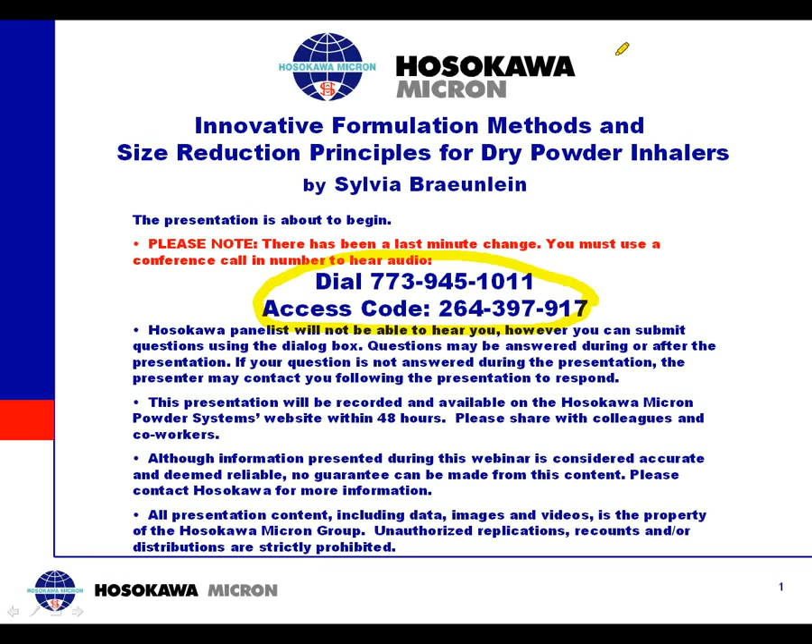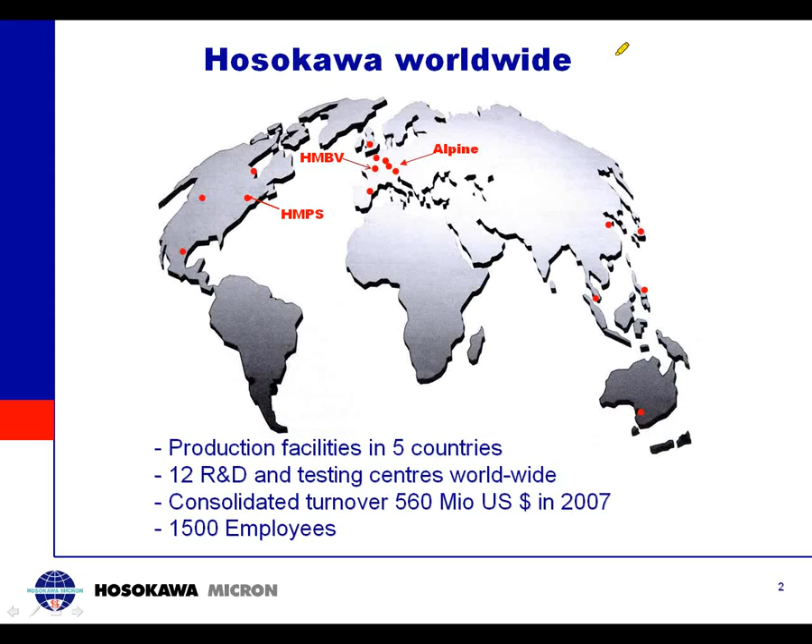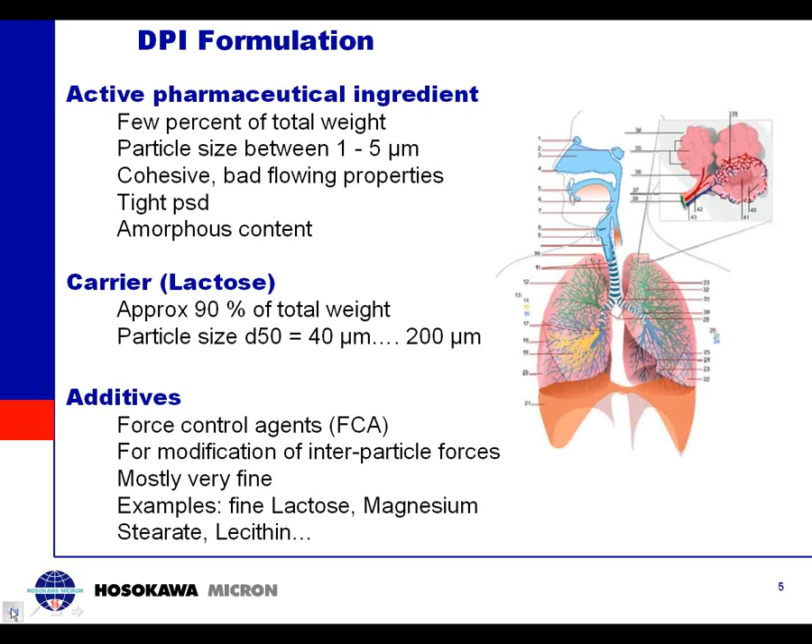These requirements need special attention when it comes to choosing the suitable micronization or particle size reduction technique. The actual formulation of the carrier and the ingredient is done by intensive mixing or mechanochemical bonding. This presentation covers the different grinding techniques as well as the formulation techniques for inhalers.

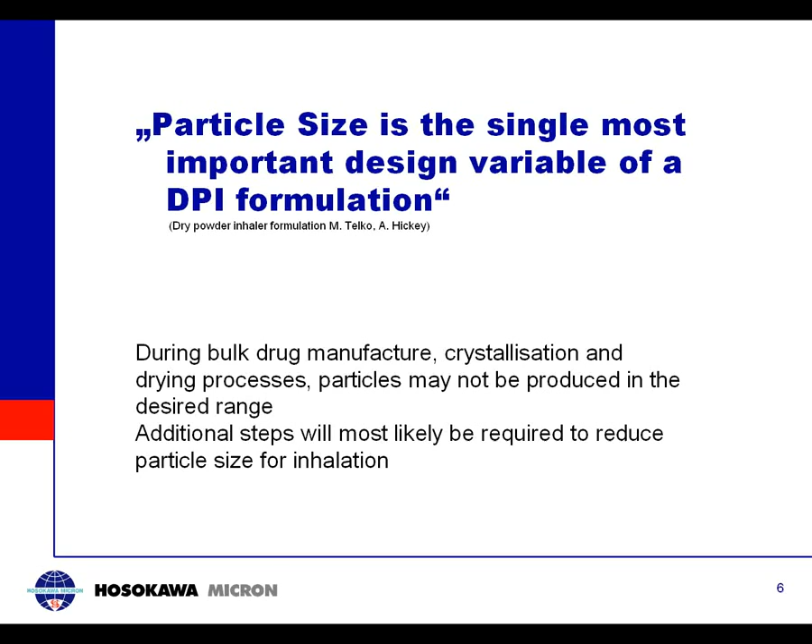Particle size is the single most important design variable of a DPI formulation. This is taken from a paper given by Mr. Telko and Mr. Hickey, Dry Powder Inhaler Formulation. Like in any other drug production, the actual manufacturing process, including crystallization and drying, cannot be sufficiently controlled to achieve the required particle size. Therefore, additional steps - in some cases only deagglomeration after the dryer, or real grinding - need to be added to get the right particle size for inhalation.

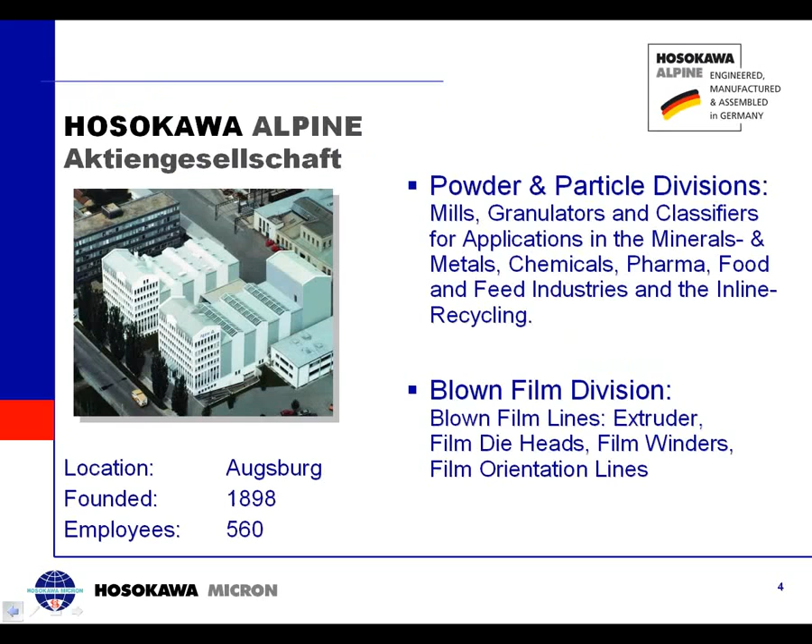I think there's a slide problem. I clicked too many times on this. Okay, here we go, sorry for that. Why is particle size - I think we missed a slide out here. I'm sorry again for the problem. Let me try again to go back. Okay, here we go, sorry.

Why does particle size play such an important role in the production of inhalers? Extra fine particles, for example, improve lung delivery, and particle size plays a crucial role in the bioavailability, solubility, and dissolution properties of drugs. Since dry powder inhalers are low-dose drugs, content uniformity is of extreme importance, and proper control of the particle size distribution is a key factor for content uniformity. Dry powder inhalers are often delivered as an aerosol suspension in a propellant, for which, again, the proper particle size control is crucial.

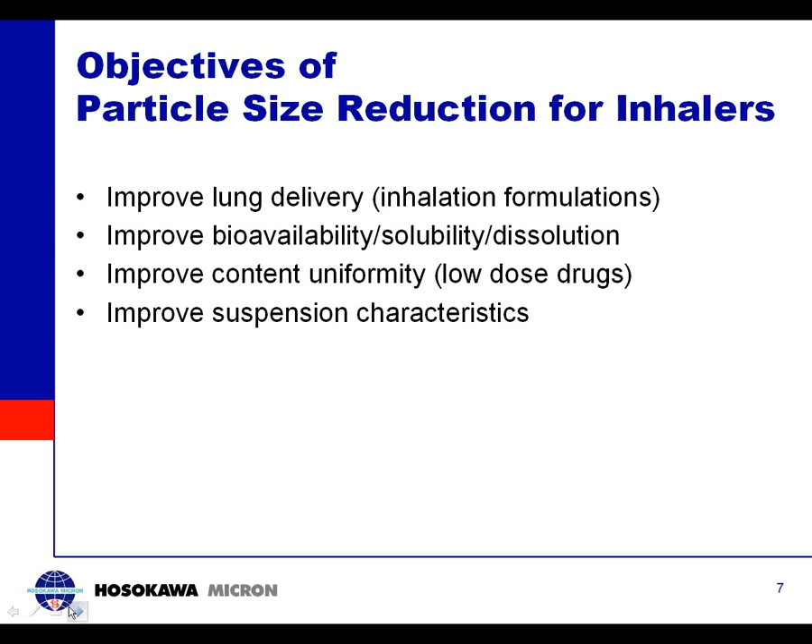To choose the suitable milling equipment, it's required to characterize the different powders to be processed. Product properties such as hygroscopicity, flowing properties, bulk density, etc. have an influence on the suitable type of mill. And of course, it's required to know the actual starting size of the feed material after the dryer, for example,

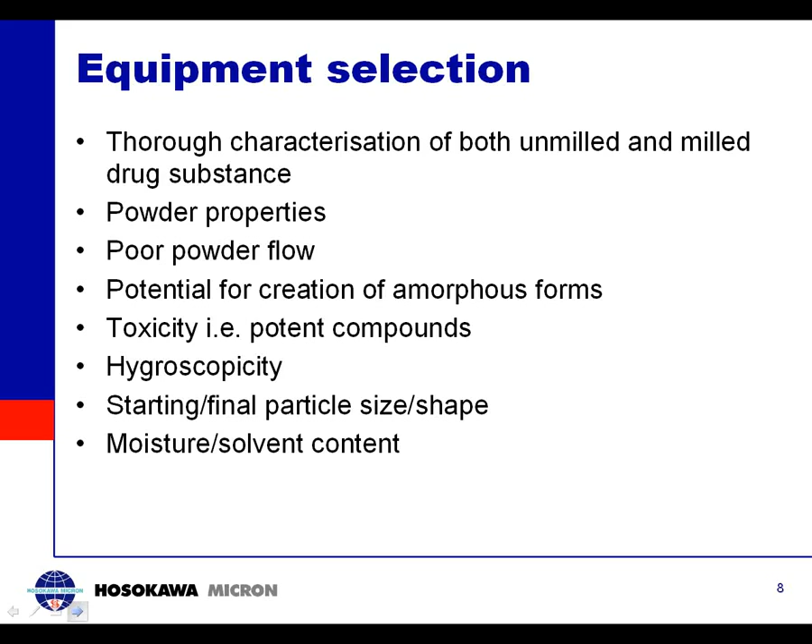because pre-crushing or deagglomeration might be required before the actual fine milling of the powder. This is an overview of the different mills typically used for fine milling APIs and the carrier material. In a second part, we will present techniques for the formulation of DPIs, and we will start with an explanation

of the different mill types and introduce applications, benefits, and limitations of each equipment. We'll start with the typical equipment used for micronization of APIs. The most common jet mill used in pharmaceutical industry for micronization of very fine particles is the spiral jet mill,

or so-called pancake mill. Shown here is a sketch of a typical spiral jet mill with its internals. You can clearly see the feed injector for product supply at the top of the grinding chamber. At the outside of the grinding chamber is the air ring manifold, which allows the compressed air or gas to be distributed to the nozzles.

The grinding gas is injected through a number of nozzles, you can see here, typically tangentially positioned at the nozzle ring. The fines outlet is at the center of the mill. The particles fed to the grinding chamber are accelerated by the high gas flow, typically in the range of 4

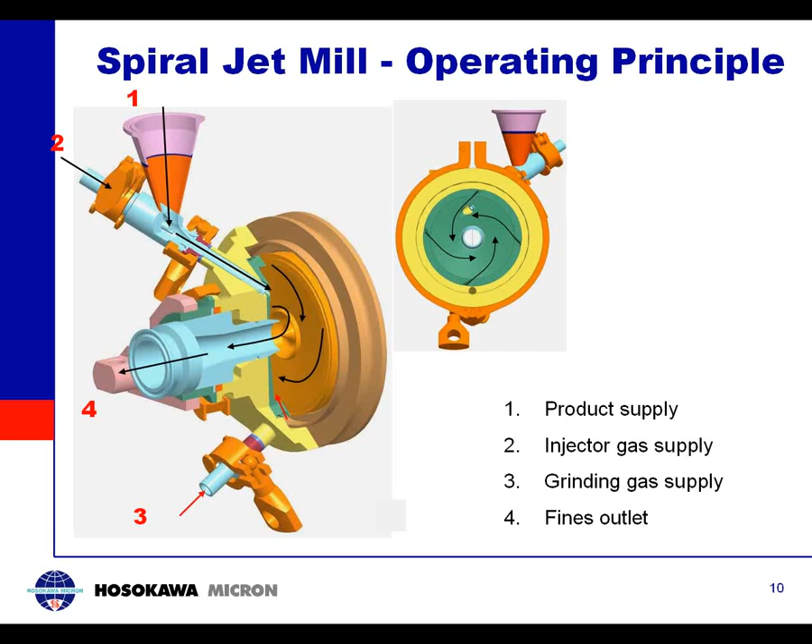Although spiral jet mills have almost vanished completely in other industries and have been replaced by more controllable fluidized bed jet mills, they still have a number of huge advantages for pharma applications. Due to the fact that there are no movable parts and they got a clear and simple design, no drives, etc., they are relatively easy to inspect and to clean.

In general, jet mills do not create heat during grinding, which is an advantage, since most pharmaceutical powders are somehow heat sensitive. And due to the above points, maintenance of those mills or operation under contained conditions is rather simple.

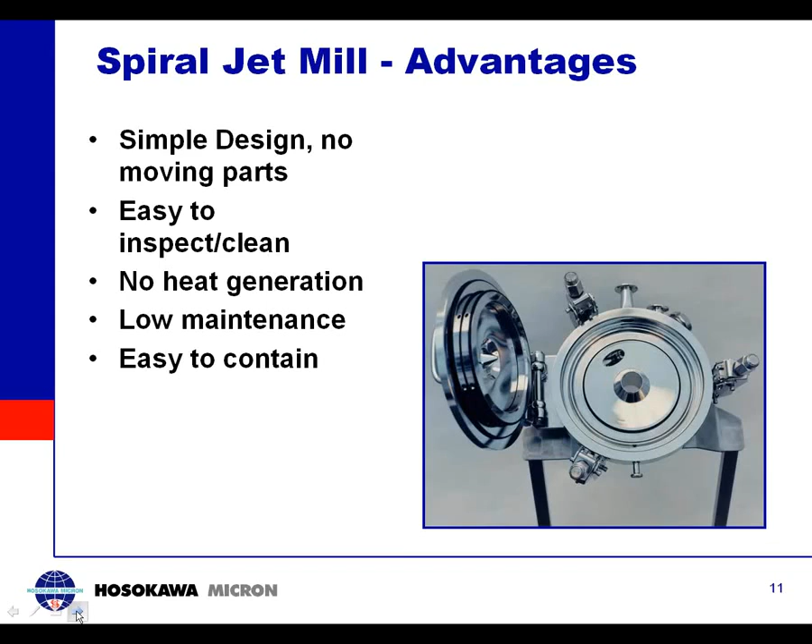The simple design of spiral jet mills comes with a number of disadvantages and limitations. Feeding is generally realized via an injector, and that means a narrow product feed inlet diameter to the mill, which limits the size of particles that can be actually fed to the mill to some single millimeters.

If the product has agglomerates, typically achieved after the dryer, a pre-crushing step, for example in a conical screen mill, is required before actually feeding to the spiral jet mill.

The biggest disadvantage of a spiral jet mill is that they are very sensitive to changes in feed material. If size and properties of the feed material changes, then the final particle size will vary accordingly.

end fineness. One issue with spiral jet mills is that the particle wall collision can be very negative when processing abrasive materials. This effect is not so often seen with pharma products, but if the products are abrasive, then this can be a major problem.

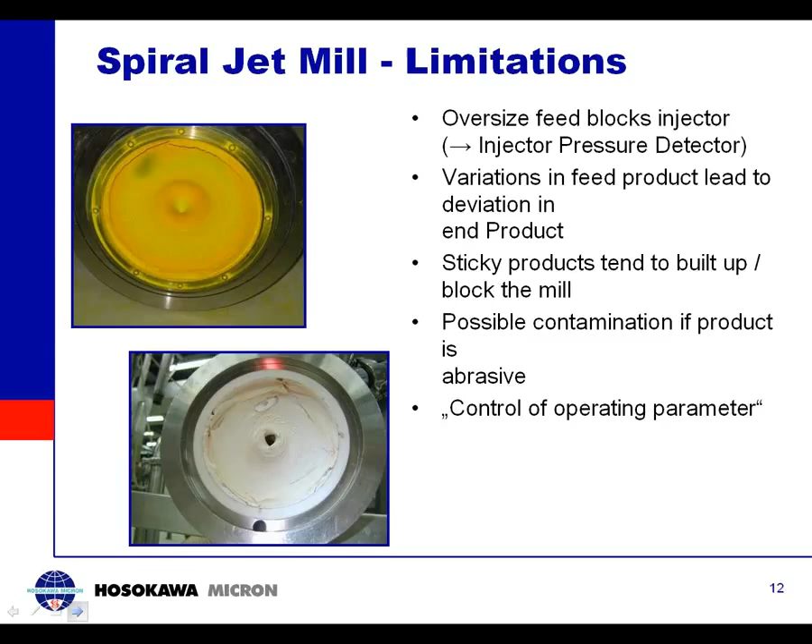Finally, spiral jet mills are rather difficult to control because unstable feed rates, build-ups, etc. have an influence on the flow pattern in the mill and therefore the final particle size.

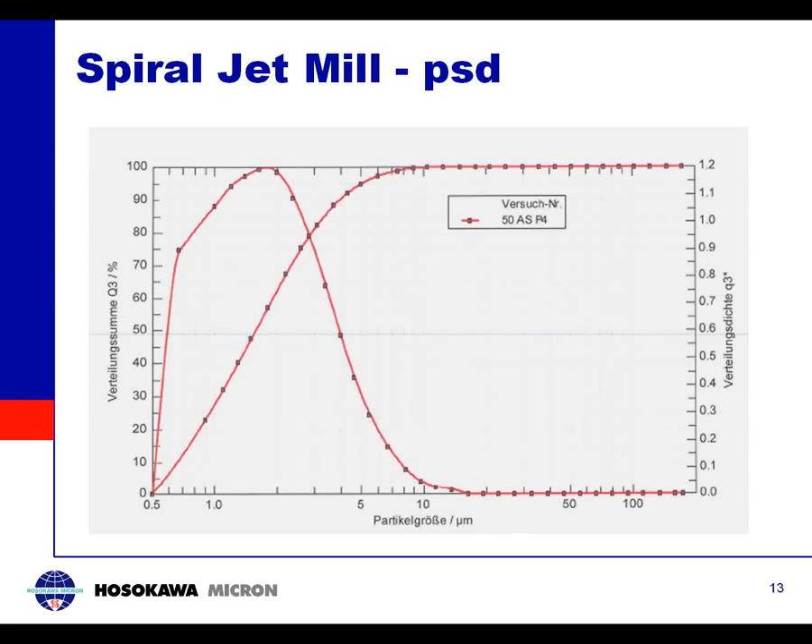The following graph shows a typical particle size distribution achieved on a spiral jet mill. What's characteristic for the spiral jet mill is the small proportion of oversized particles which are typically able to leave the mill more or less unground because there is no classifier installed in that mill, apart from what we call a static classifier.

Spiral jet mills come in many sizes depending on the required capacities or batch sizes. The left-hand picture shows a typical size of a small production unit. The spiral jet mill in that picture is 140 millimeter diameter, which gives typical capacities in the range of 5 to 10 kg per hour.

The complete system is a very simple setup, consisting of a feeding unit, in this case a twin screw feeder with an agitator, feeding directly into the injector of the mill. The fine product dispersed in air gas is conveyed to the automatic filter, where the product is separated from the airstream and discharged through a simple manual flap valve into a container. The container is not shown in this stage.

There is a HEPA filter installed after the automatic filter, and a blower which is installed in a technical area, not shown on the photo. The blower serves for conveying the process air. As you can see, the installation of a spiral jet mill can be rather compact, which is again an advantage because it's easy to clean.

The actual photo shows a unit that is also sterilizable. Feeder and mill can be sterilized in an autoclave, completely mounted on the movable frame, and the filter can be separately sterilized on its frame.

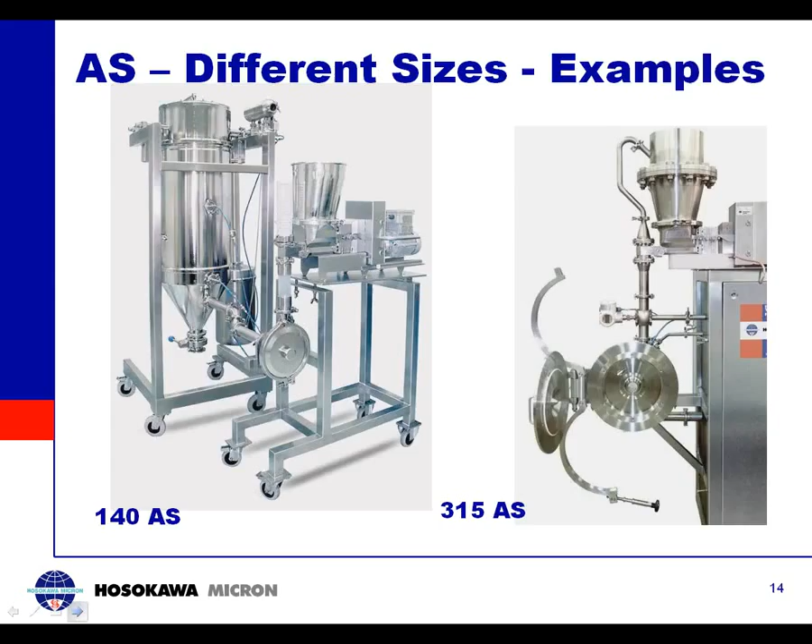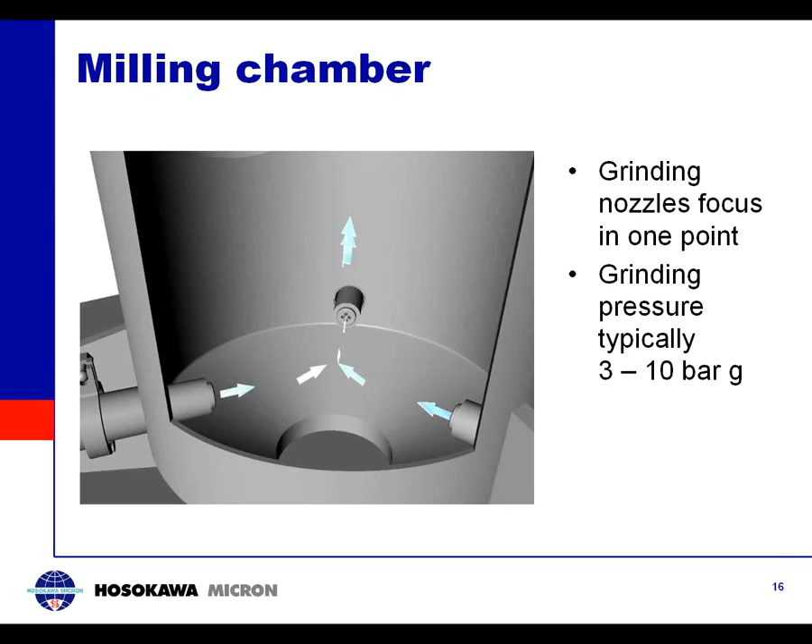This slide shows the bottom section of the fluidized opposed jet mill with the grinding nozzles. Contrary to the spiral jet mill, the nozzles focus in one point, and compressed air gas is applied at pressures in the range of 3 to 10 bar. The product is fed to the mill gravimetrically and falls into the actual grinding chamber. There the particles get accelerated by the fast gas stream, and grinding takes place in the center of the mill by particle-to-particle collision.

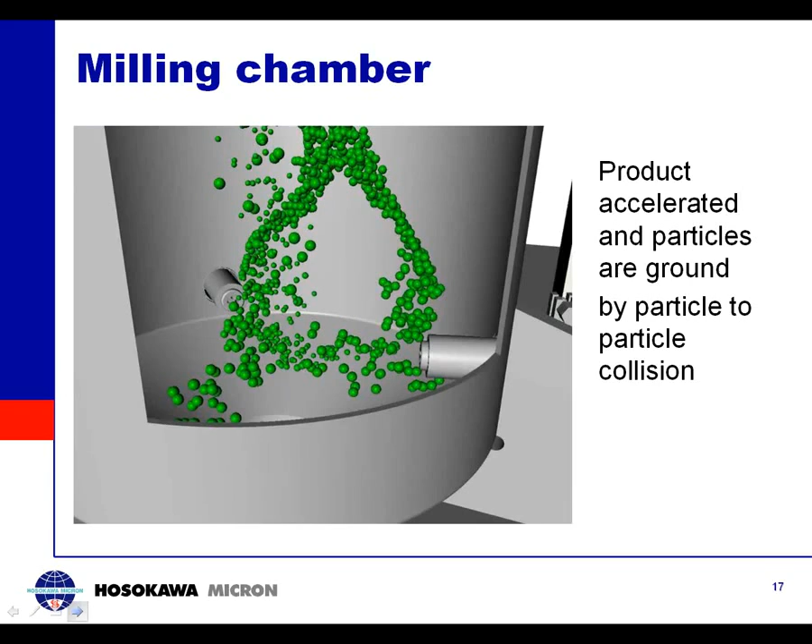The particles are offered to the integrated air classifier. This classifier is driven by a frequency converter, and the speed can be steplessly adjusted. The air gas flow has to go through the lamellas of the classifier wheel. The particles are subject to two forces, the drag force of the air and the centrifugal force of the classifier wheel. Fine particles rise with the air, whereas coarse particles are rejected by the classifier and drop back into the mill. High classifier speed means a fine end product, low speed means a coarser product. It can be adjusted, as said, steplessly.

These classifiers are typically suitable for finenesses in the range of 5 to around 150 micron. Anything else in between can be adjusted.

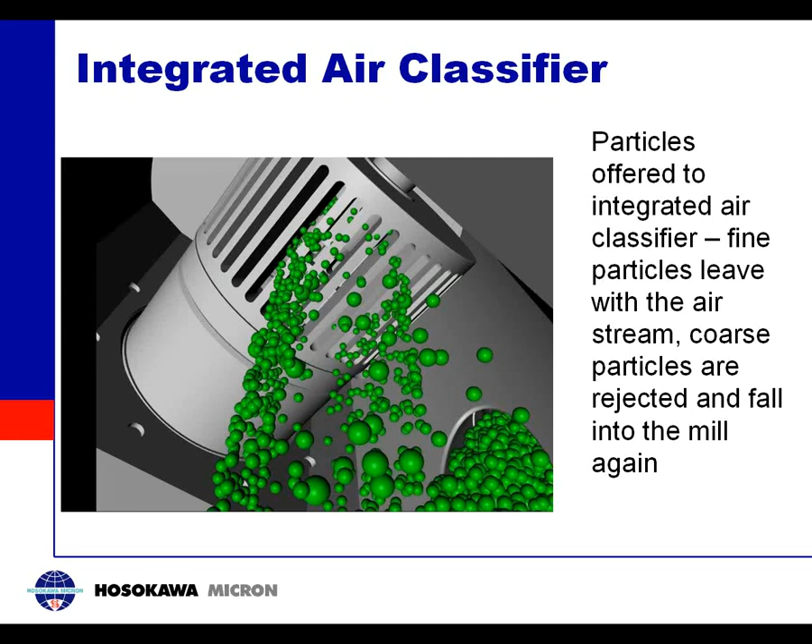I think the explanation of the working principle leads automatically to the advantages of those kind of mills. With the integrated air classifier, it is possible to exactly adjust the end fineness, and such a mill is much less sensitive to variations in feed material. Due to the fact that grinding takes place by particle-to-particle collision, there is no contamination and no wear. Typically, those mills create a steeper particle size distribution because the particles will leave the mill almost immediately if they can pass the classifier wheel.

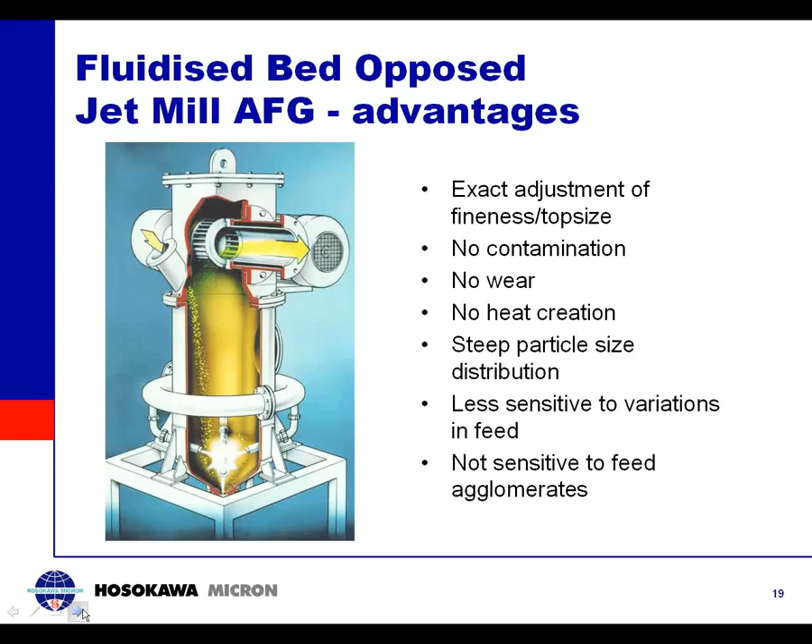Feeding can be realized through an airlock. Therefore, these kind of mills are not sensitive to agglomerates in the feed material, etc.

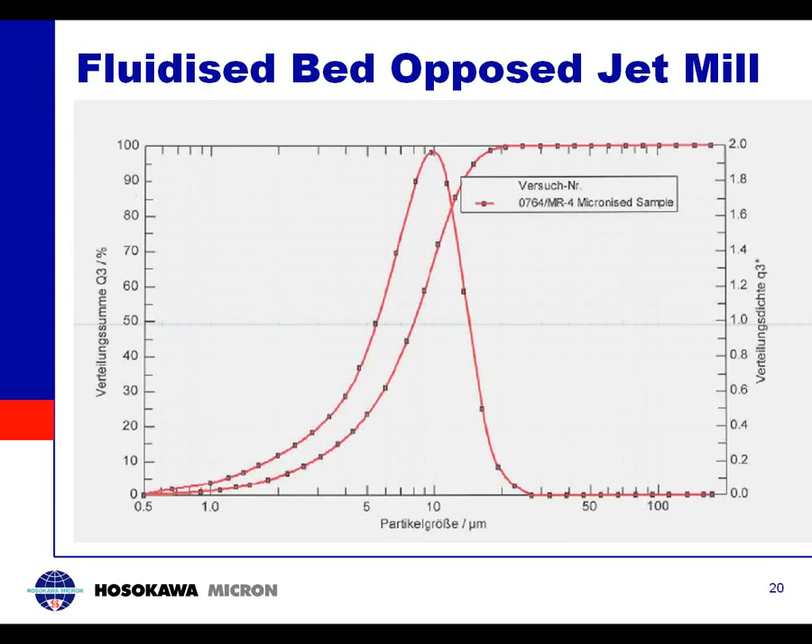Looking at this graph, it shows a typical particle size distribution as you get it from a fluidized bed-opposed jet mill. Looking again at the top end of the particle size distribution, the integrated air classifier clearly provides a sharp cut at the top end of the PSD.

There are a few disadvantages when it comes to opposed jet mills. These are the higher investment costs and the higher cleaning effort, and also more sophisticated controls are required.

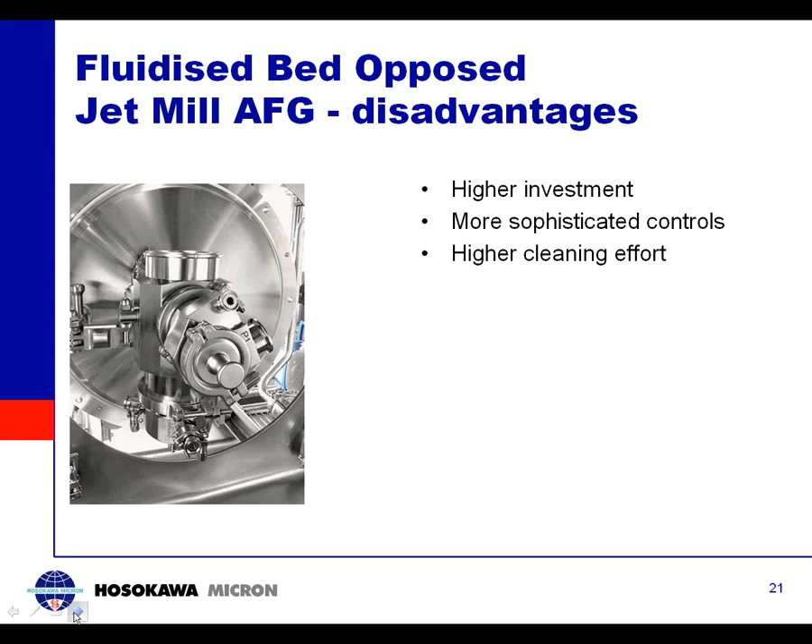In other industries, opposed jet mills with integrated classifiers have long replaced spiral jet mills. The photo shows an opposed jet mill size 100 millimeter with a classifier wheel of 50 millimeter. This size represents already a small production unit for capacities in the range of 1 to 10 kg per hour.

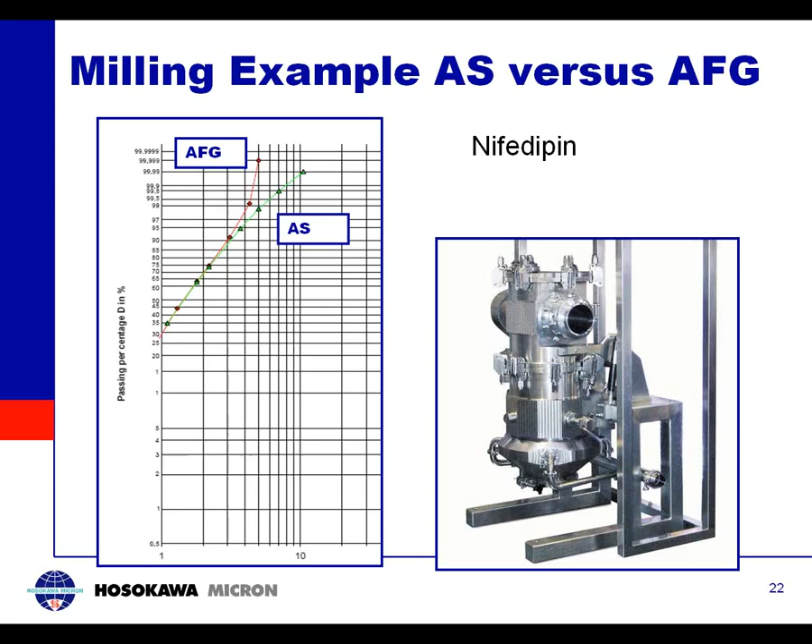To optimize the micronization step for APIs, it's important to properly control the feed rate. This is especially important with spiral jet mills, which are much more sensitive to variations in feed rate. Variations in grinding pressure will also lead to deviations in the end fineness and therefore need to be properly controlled.

For DPIs, the process gas quality can be crucial, specifically the moisture content. The moisture content not only has an influence on the actual flowing properties, stickiness, and electrostatic charge of the powder, but it can also influence the creation of amorphous content, and therefore possible recrystallization in the following processing steps.

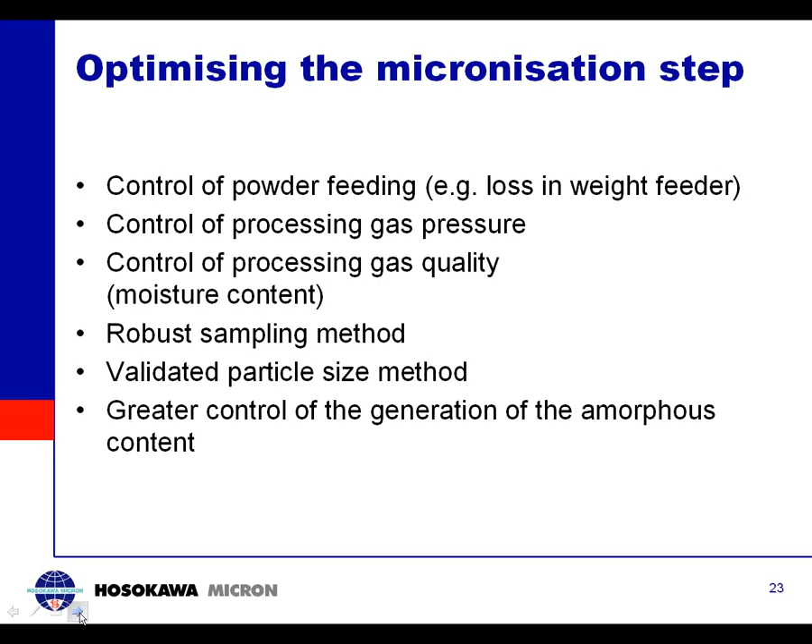Last but not least, when it comes to determining the suitable mill type, the suitable method of powder sampling and particle size analysis is also very important.

This leads us to the next part of the dry powder inhalers, the carrier material.

Carrier material is often lactose. To achieve the required properties such as optimum flowability, the particle size distribution is crucial for the carrier as well as for the API. Depending on the type of applicator, the optimum fineness might be in the range of 40 micron or up to 200 micron. High content of fine dust is normally not allowed, so production of the carrier is often a combination of milling, classifying, and sometimes a blending step.

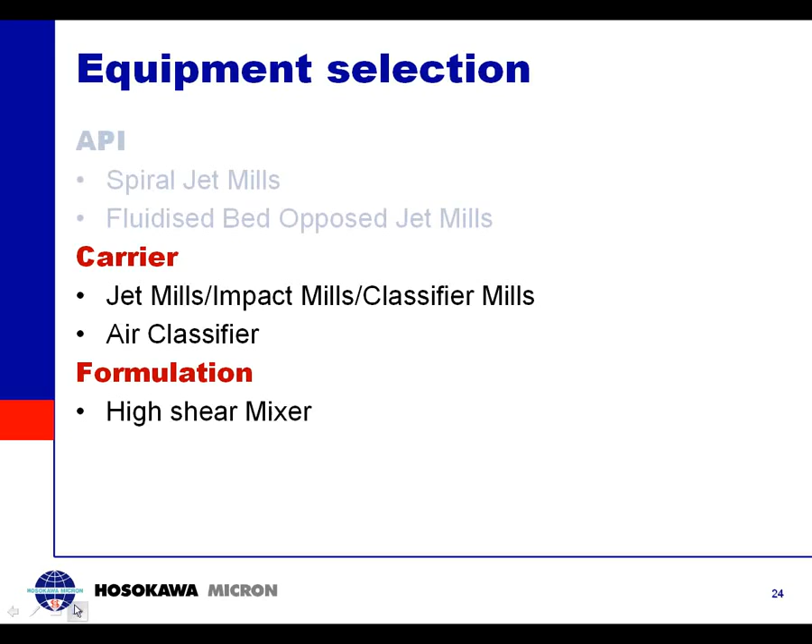The beater works as well as a blower and creates airflow. This airflow pneumatically transports the material to the subsequently installed filter, where the product is separated, and additionally the airflow cools the product. Nevertheless, mechanical impact mills do create heat, and there is a typical temperature increase at the milling step.

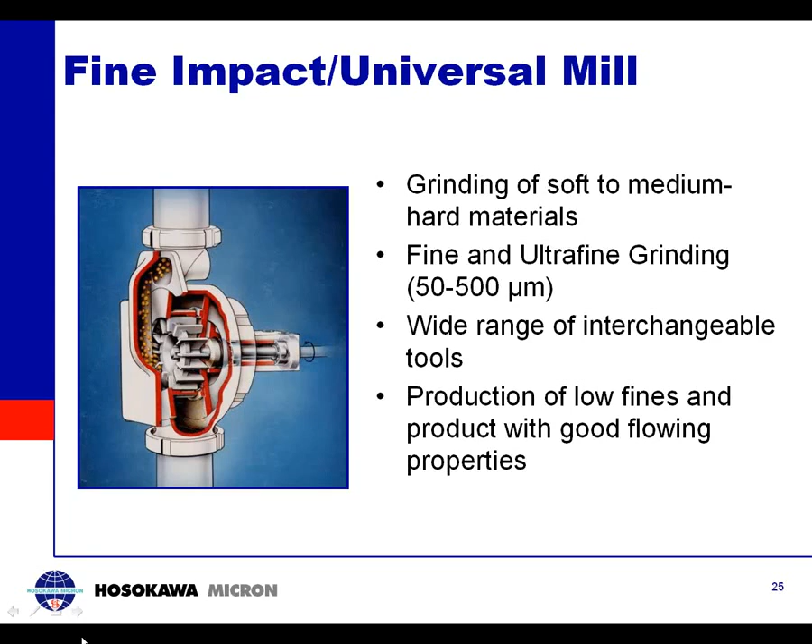It's ranging from single digits up to, let's say, 20-25 degrees Celsius. The difference between the formerly shown fluid energy impact mill is that the speed to which the particles get accelerated is much lower, and therefore the achieved particle size is coarser. Circumferential speeds of those kind of mills are in the range of maximum 120 to 150 meters per second. Those mills are suitable for medium range finesses, and the advantage is that they can be equipped with a number of different grinding tools suitable for different products and requirements.

The picture at the right hand shows one of the very typical grinding tools used in pharma industry, pin discs. There is one rotating pin disc, rotating in the housing, and one static pin disc at the door. Compared to beater discs in combination with screens etc., pins actually deliver the highest possible fineness, but cannot be used if the material is too heat sensitive or very abrasive.

As an example, pin mills are used for fine grinding of lactose. The typical finesses are then D97 of 200-300 micron, and the typical maximum fineness with lactose and pin mills is around 90% below 75 micron.

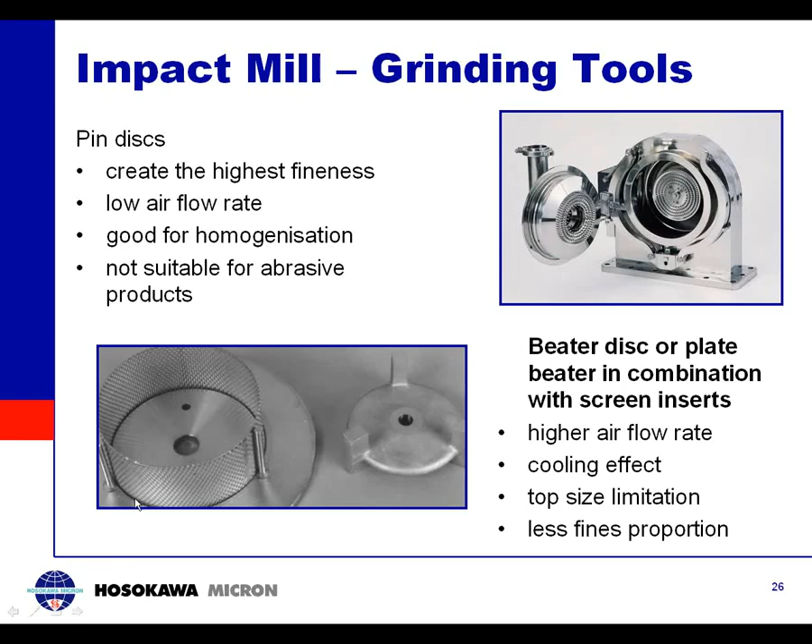When steeper PSDs or higher end fineness is required, then an impact mill with an integrated air classifier might have advantages. As we have earlier seen with the jet mills, a typical mechanical impact mill can also be combined with an air classifier. The operating principle is similar. The bottom section shows the impact mill with the beater and the grinding track. The top section is equipped with an air classifier.

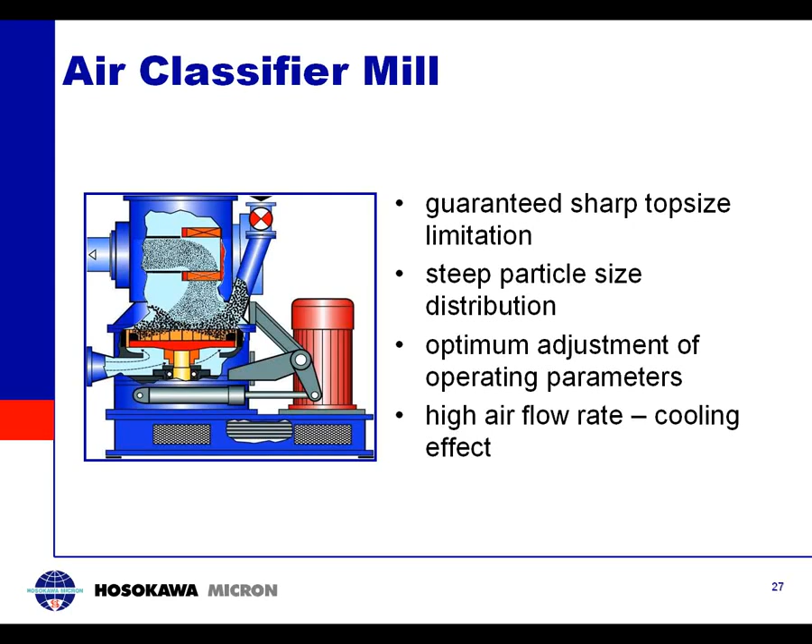Airflow is created by a blower and sucked through the system, through the grinding zone and through the classifier out of the system. This airflow transports and cools the product and offers the particles to the integrated classifier. Again, the fine particles can leave the mill, and the coarse particles are rejected and dropped back into the mill. By adjusting mill speed, classifier speed, and airflow rate, there is optimum control of the achievable end fineness and particle size distribution. For example, low mill speeds and high airflow rates lead to a steep particle size distribution.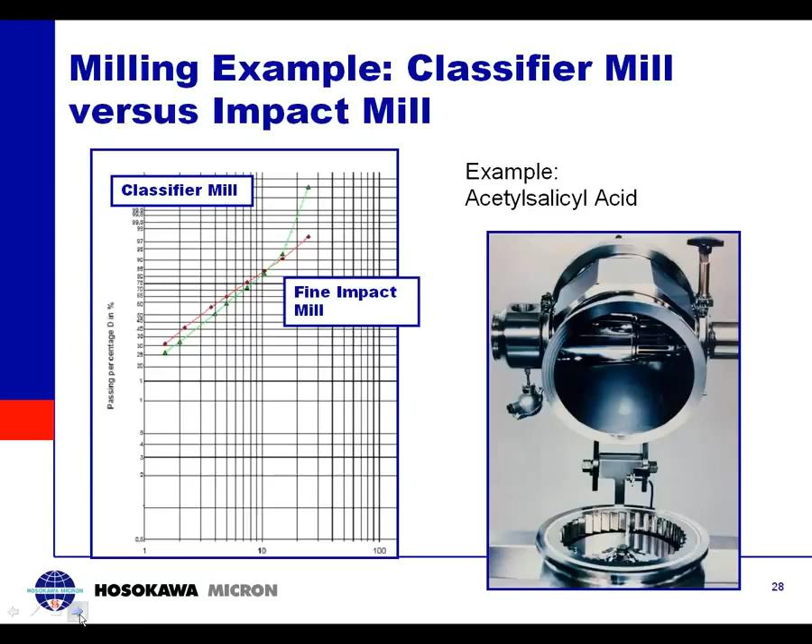We have already introduced the operating principle of an air classifier in combination with different mills. These air classifiers can also be used for the separation of powders. For the production of carrier material, there is often a classification step after the actual milling step. The principle is more or less the same. The material is gravimetrically fed to the classifier from the side or from the top. There is an airflow created by a blower. The feed material will be dispersed in air or gas and then offered to the actual classifier.

The coarse material will then be rejected by the classifier and will drop to the bottom, where the coarse fraction is collected. The coarse product is collected underneath the classifier, and in our case the coarse product is then the final product, and the fine fraction will leave the classifier and is separated at the filter and is then used for other purposes or is waste.

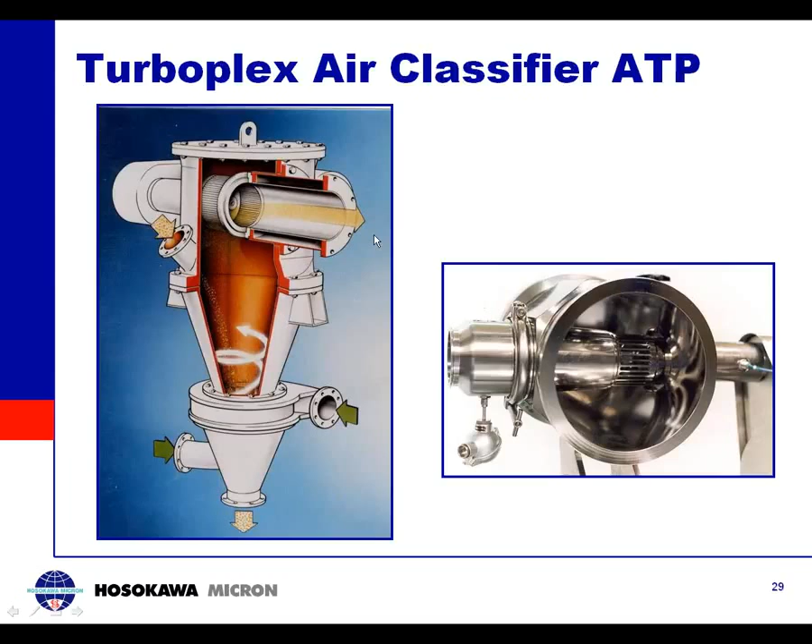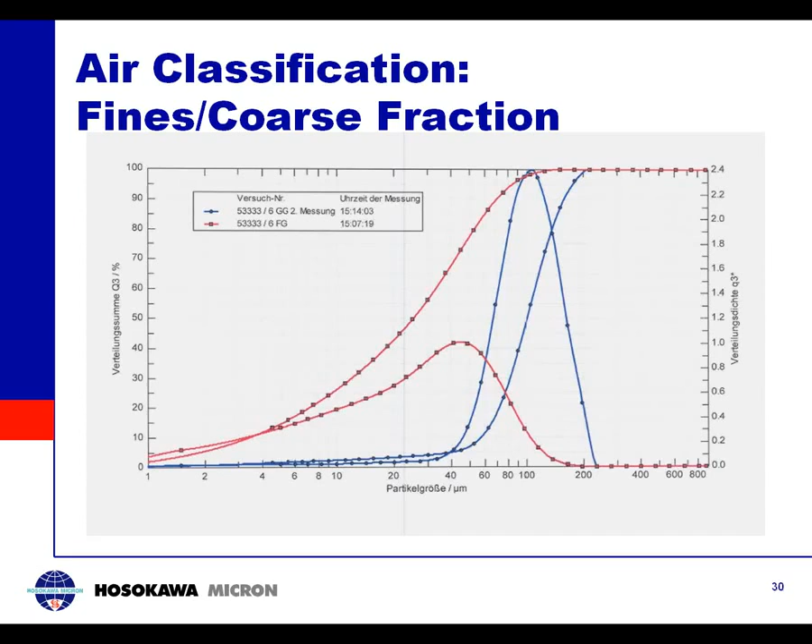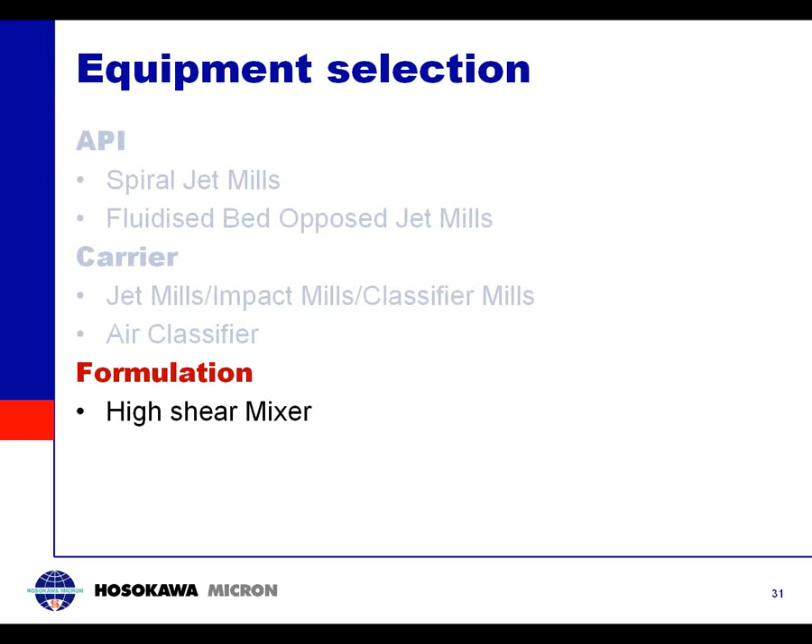To summarize the size reduction part of the presentation, both carrier material and API need a very specific particle size distribution, which leads to the different grinding technologies required. We hope we were able to provide you with a good overview of these techniques. The second part of our presentation is the actual formulation of dry powder inhaler by high shear mixing.

prepared to have a defined surface area and surface energy. To achieve an even layering of API particles, an appropriate blender with the correct operational parameters needs to be selected. This allows for the proper handling of the APIs, which is typically a cohesive powder and normally a fairly difficult to work with, especially in the smaller quantities that are needed.

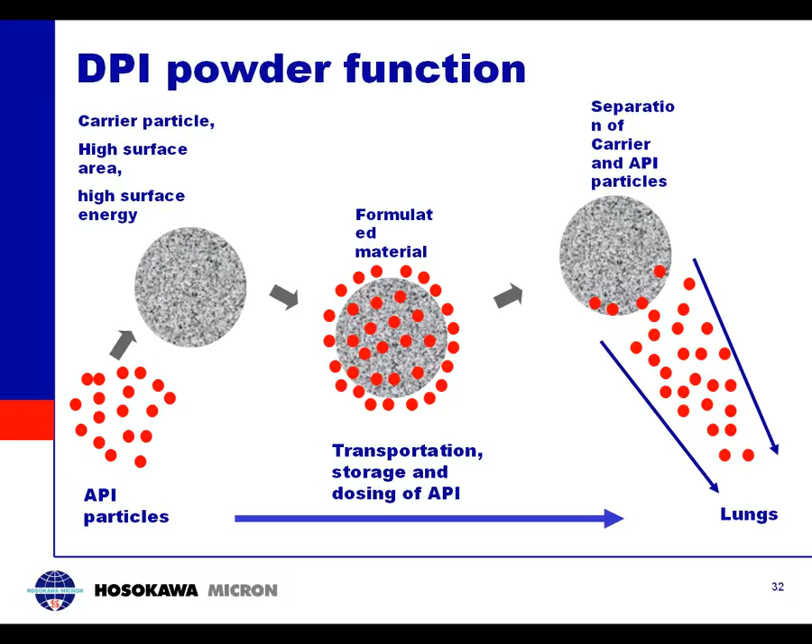In the final dosing stage, the formulated particles will allow separation of the API into the single particles, resulting in micron-sized therapeutic dosage being able to reach the required depth in the lungs.

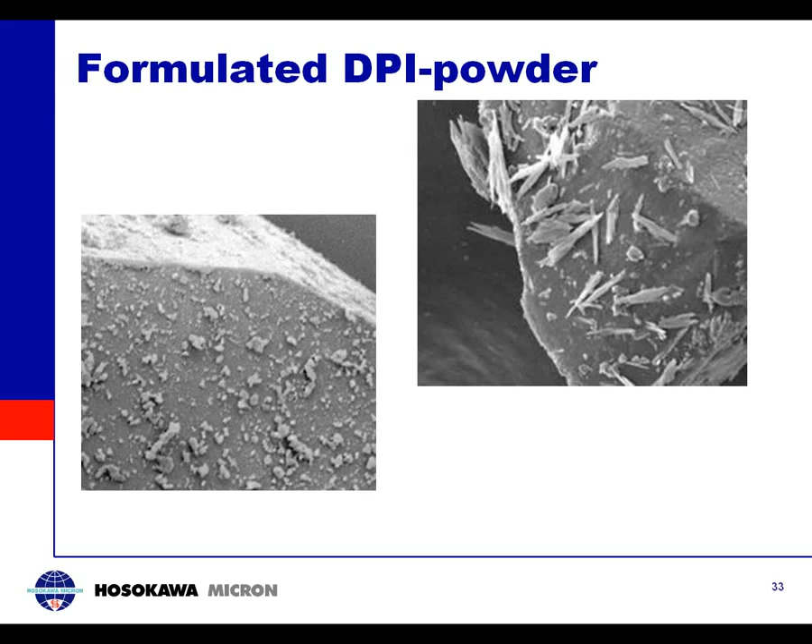DPI powder characteristics, which are relevant to the quality and performance of the formulation, include certain aerodynamic properties like particle size, density, and shape of both formulated particles as well as the API. Also, the phenomena related to the interaction between the carrier particles and the API play an important role in the final quality of the product.

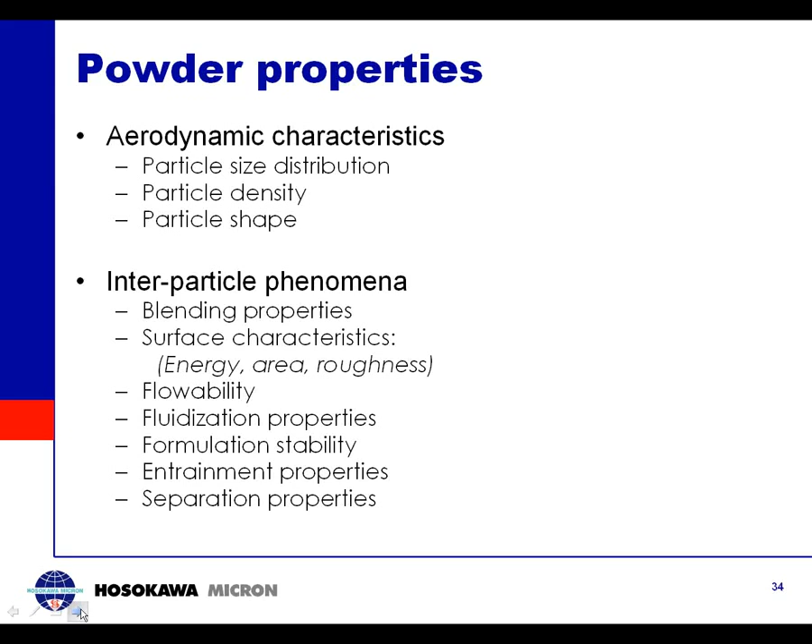The blending properties and surface characteristics of the carrier particles, which will affect the bonding between the API and the carrier, the flowability of the formulated material, as well as the fluidization properties, together with the entrainment and separation characteristics, determine the physical behavior of the formulation in the inhaler device.

In order to obtain the right formulation, a balance has to be found between sufficient mixing energy actually required to disperse the API as single particles between the bulk carrier particles, and on the other hand, the mixing energy cannot be too high, since this could lead to possible damage of the carrier particles, resulting in undesirable variations in the product characteristics. Similarly, the bonding of the API particles onto the surface of the carrier particles has to be sufficiently strong to form a stable formulation.

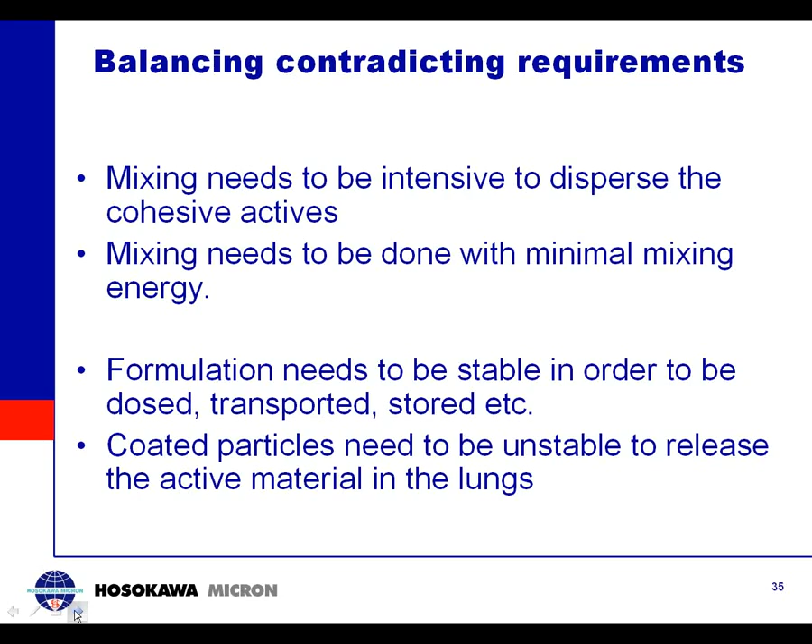Just as above with the mixing, the bonding strength has to be such that while providing the proper handling characteristics, it also needs to be capable of releasing the API while being inhaled. Hence, this requires a dedicated mixing process, as well as a proper selection and manipulation of the powder properties associated with the DPI formulation.

The most important powder properties we have available as a tool to optimize the formulation are the interparticle forces. These forces affect the interaction between the API and the carrier particles, and the proper balance between the sufficient bonding and separation is a matter of controlling these interparticle forces.

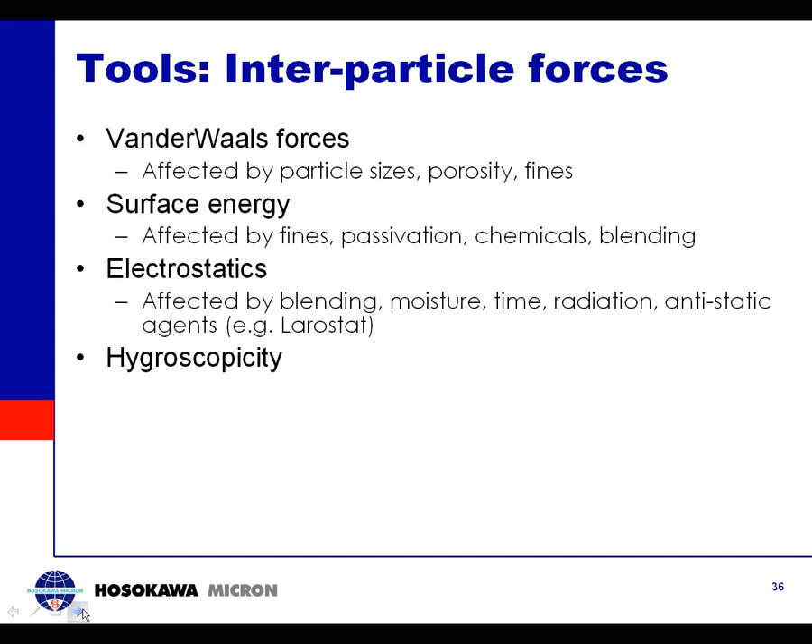Most important examples of these forces are van der Waals forces, surface energy, electrostatic forces, and the hygroscopicity of both of the particles. In order to manage all these different interparticle forces, a good control over your blending process is essential and will widely affect the choice of the blender to be used.

In order to understand the principle of a dry powder blender, the different mixing mechanisms will be illustrated. First is the overall mixing mechanism, which takes care of the distribution of one component within the other. Key here is to be able to transport the particles throughout the mixture. An optimal mixing is achieved when the different components can be randomly distributed.

This process of mixing powders is suitable only for free-flowing powders which do not possess any significant interparticle forces, allowing the particles to move freely amongst each other. Excipients, which generally have a coarse particle size distribution, are a good example of a free-flowing powder.

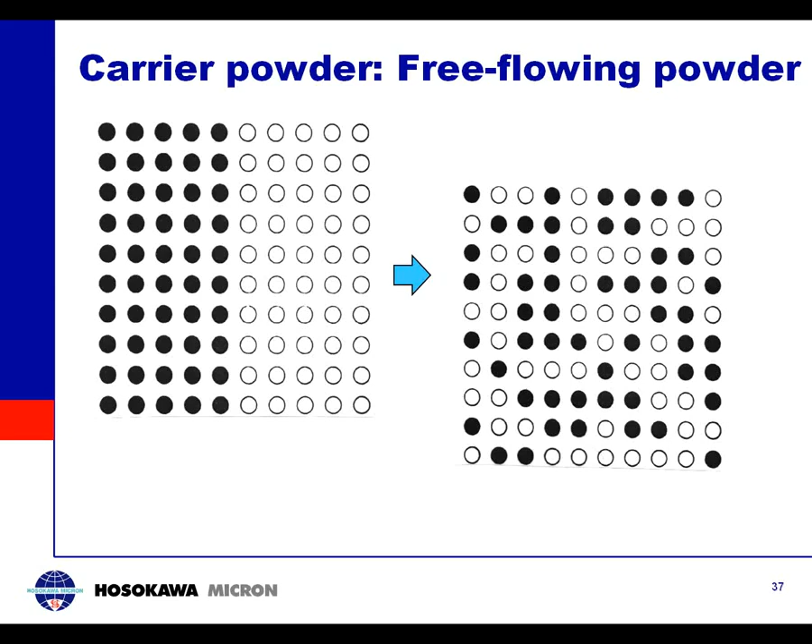APIs, on the other hand, are typically cohesive and much more difficult to mix. Due to the relatively strong interparticle forces, these powders cannot move freely and will form agglomerates. In this case, mixing such powders requires not only transportation of particles, but also extra energy to break up the interparticle forces. Therefore, mixers for cohesive powders are often called intensive mixers.

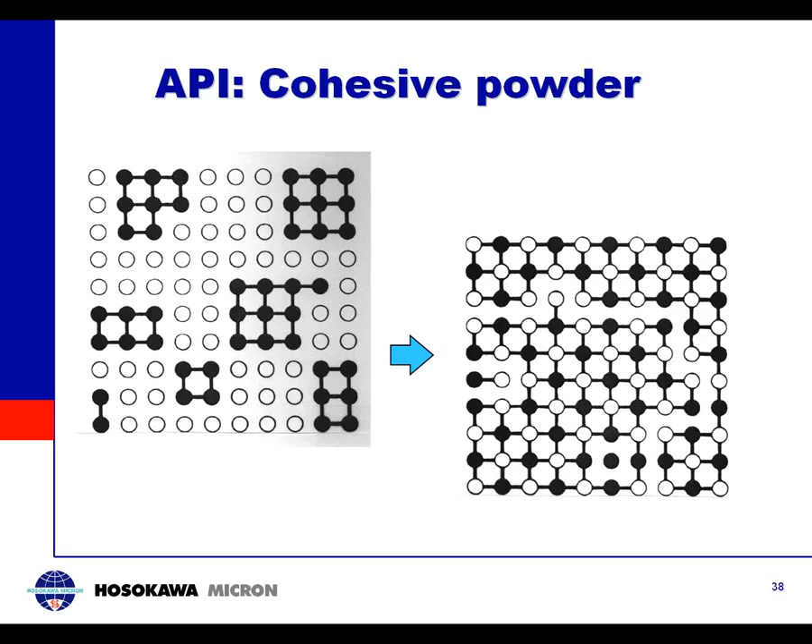The most common mechanism used for intensive mixing of powders is the impact mechanism. Here, a knife-type tool literally cuts through the agglomerates associated with cohesive powders to form smaller fractions. Although very efficient in dispersing fine cohesive particles of the API within the coarse matrix, this mechanism does not really lend itself to providing acceptable coating of the coarse carrier particles.

For this, it is better to use a shear mechanism, where the dry powder is subject to frictional forces, resulting in a rolling action of the particles and hence separation. Both the coarser and finer particles will be subject to the rolling action, allowing for a very effective coating process.

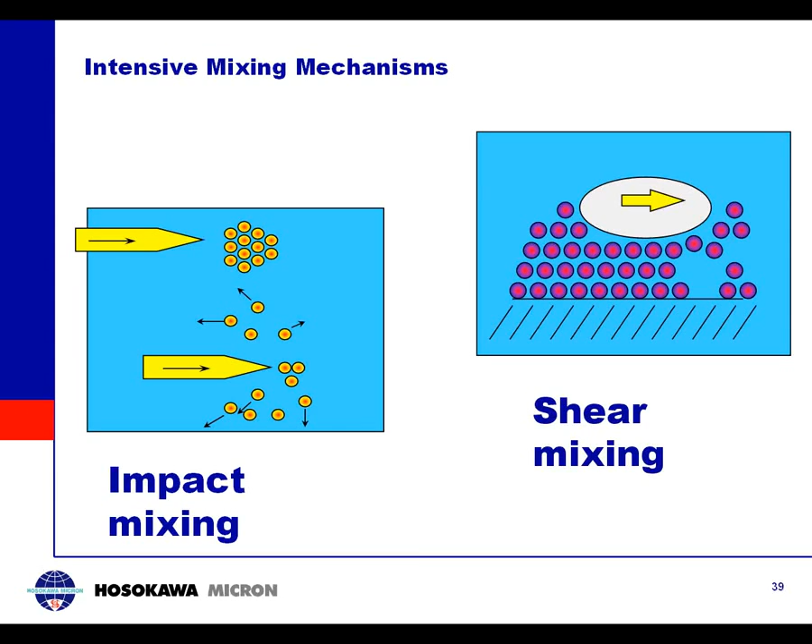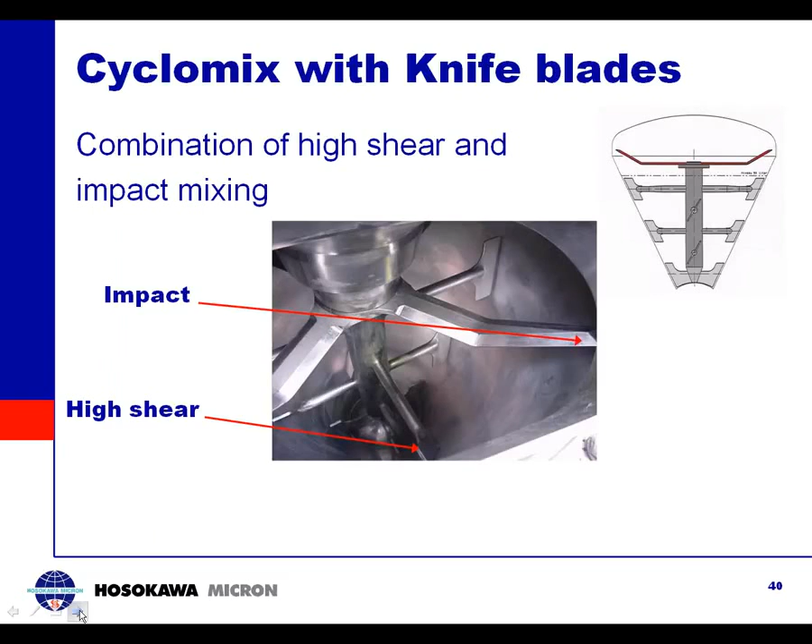One such mixer which combines both intensive mixing mechanisms is the Cyclomix. A top-driven rotor has both a set of knife blades for impact mixing as well as shearing paddles, which allow for controlled shear and impact of the DPI formulation. By controlling the speed of the rotor, both effects can be separately controlled.

The material to be mixed is centrifuged by the rotating paddles, causing the mix to rise along the walls of the conical-shaped mixing bowl, while the domed cover redirects it back down to the center. The shear forces along the walls result in intensive mixing, which, combined with the circulation pattern, produces a rapid overall mixing time.

With increased rotor speeds, larger amounts of material are forced up to the top section, where the product subjected to the knife blades produces higher impact energy relative to the shear forces applied.

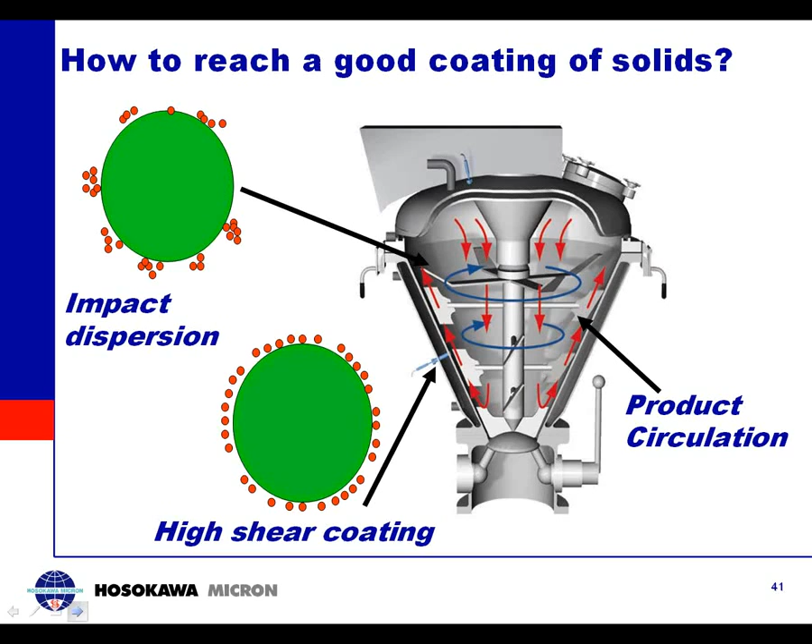Additionally, efficient cooling and heating of the product can be accomplished via a jacketed vessel. Effective heat transfer takes place due to the application of heating or cooling energy in the exact shear zone, resulting in very accurate temperature control of the formulation.

All the required effects for the formulation can be accurately controlled by adjustment of rotor speed, paddle angle, paddle gap, and process times. Since there are multiple variables utilized, a matrix structure with extreme conditions verified during testing can provide the basis for proper combinations required.

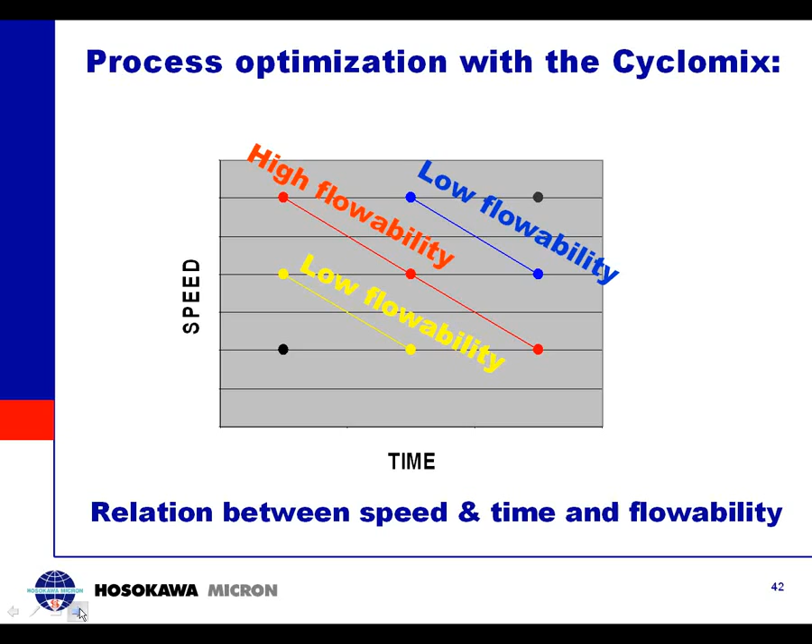Optimization of the process can be achieved using interpolation of the matrix data while keeping an eye on side effects, like breakage of particles at extreme high speeds and/or temperature development at extended processing times. Unfortunately, due to the confidential nature of every customer-specific formulation, we are not able to provide operational data associated with DPI powders during this presentation. Yet, to demonstrate the discussed effects, we can share the following examples.

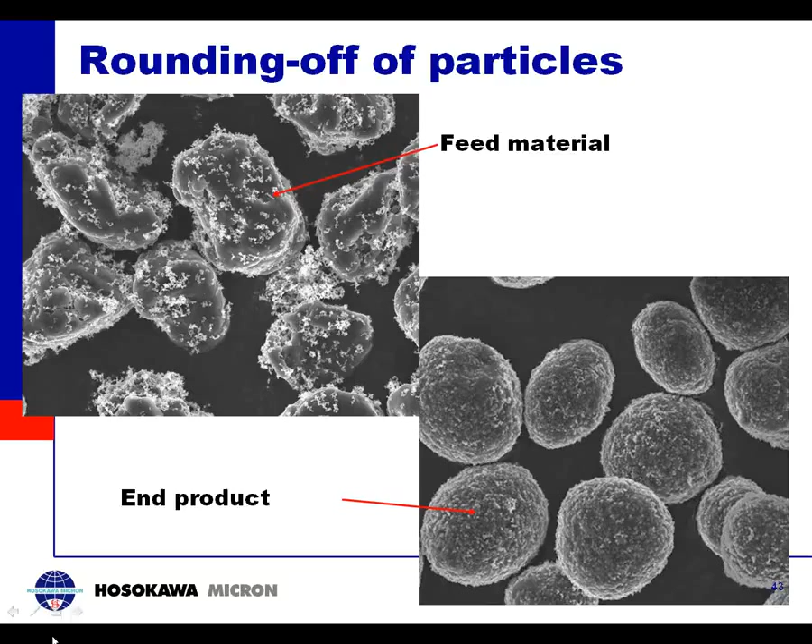The second example here is another illustration of good coating performance achieved with the Cyclomix. Here, a fire extinguishing powder was treated with stearates in order to make it water repellent. Deficient or non-uniform stearate coating over the carbonate surface will cause the powder to absorb water and dissolve rapidly, like on the left side. However, the photo on the right shows that with the uniform coating achieved with the Cyclomix, the material is unable to mix with water and precipitates to the bottom, leaving clear water in the container.

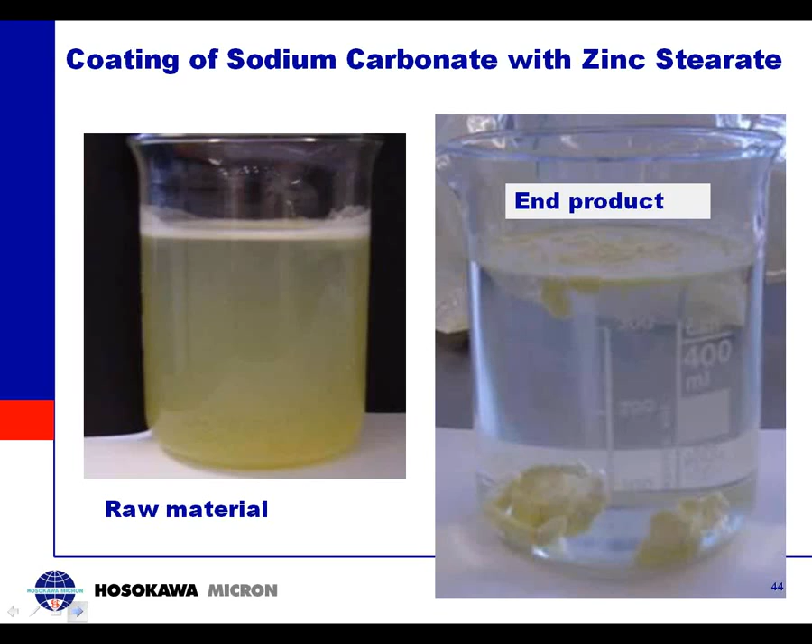To summarize the advantages of this high-intensity impact and shear mixer: there's perfect dispersion of fines due to the combination of impact and shear mixing. We get accurate temperature control due to the jacketed vessel. Rounding off or densification of particles is possible, and single layer coating is achievable with the Cyclomix. We can create homogeneous mixtures without any lumps, and the whole process is extremely reproducible.

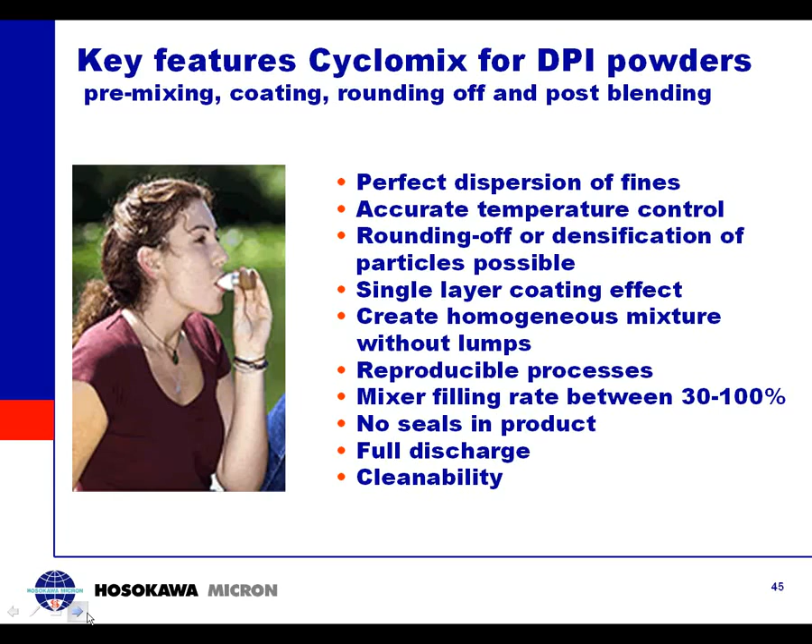With the conical design, vessel filling rates can range between 30 to 100%, and we can fully discharge through the central bottom discharge valve. There are also CIP and SIP designs available.